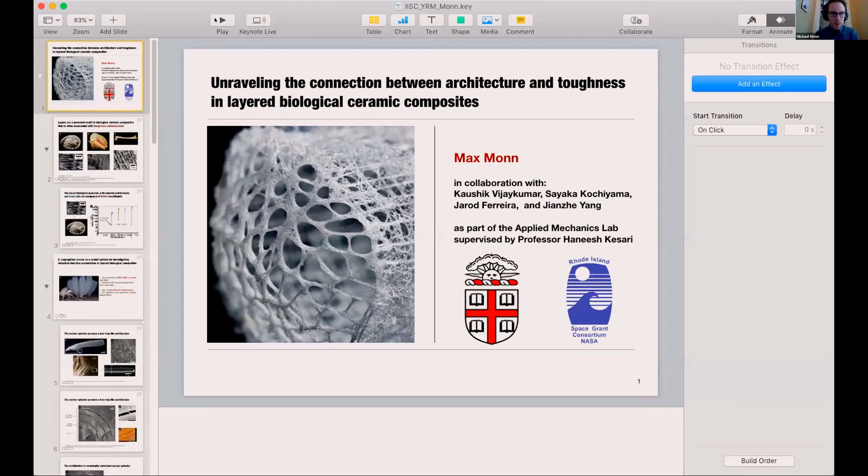Okay, great, awesome. So I'm going to be talking about some of the work I did during my PhD, focusing on a paper I just published this year. The talk is titled Unraveling the Connection Between Architecture and Toughness in Layered Biological Ceramic Composites. It's a mouthful, but I hope we can break it down and learn something new about biology and the world around us, using fracture mechanics to make that exploration.

I did this work in collaboration with a number of people, and I think there's a lot of connectivity with what Professor Simha said during his talk. My collaborators are Kaushik Vijaykumar, Sayaka Kochiyama, Jarod Ferreira, and Jianzhe Yang. Kaushik actually did his master's at IISc under Professor Narasimhan, and he was my batchmate in PhD. We worked with Professor Haneesh Kesari, like Ram had mentioned, and I think what you said, Professor Simha, about mentorship and what you've really demonstrated through your mentorship has resonated with me through the type of mentorship

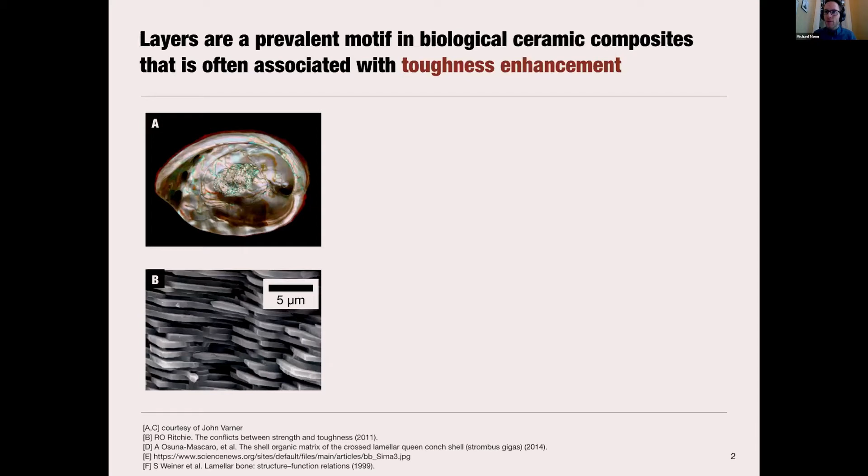I'll start off talking generally about biological materials. Layers are really a prevalent motif in these biological ceramic composites. What I mean by a biological ceramic composite is something like a seashell. If you look at a seashell, like in figure A here, this is a red abalone, and if you cross-section this iridescent layer called nacre and look at it under a scanning electron microscope, you'd see something like figure B, where you have this brick and mortar structure. The bricks are composed of a calcium carbonate mineral, and between the bricks there's a really thin layer of a softer proteinaceous material.

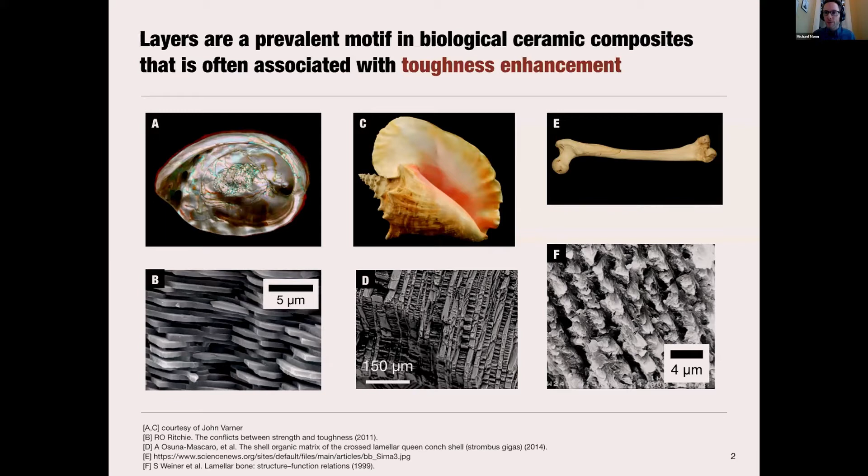This motif appears in other types of shells from other families and taxonomic classes, like this conch shell. In the conch shell, the layered structure is a bit more complicated - it has some hierarchy, with layers within layers, and within each hierarchical level you have this recurring motif of ceramic bricks surrounded by very thin protein layers. We even see this in our own bones. If you were to etch a cross-section of bone, you would etch away some of the mineral, the hydroxyapatite, and you'd see that we also have this alternating structure of mineral and soft proteinaceous material.

What's very interesting about this architecture is it leads to very drastic changes in mechanical behavior. So this shows some tensile tests.

This is from Professor Barthelat, who the next presenter was one of his students, I believe. These are the tensile tests performed on pure aragonite, which is that calcium carbonate mineral that makes up those tablets, as well as nacre, both dried and hydrated. And while there can be a huge discussion about the role of hydration in these materials, I really just want to focus on the hydrated case, because that's the native case, how the shell actually performs in its native environment.

You can see that the mechanical response of these materials is very, very different. The aragonite is typical of a ceramic. It's fairly linear in stress and strain up until catastrophic failure, whereas the nacre has this almost elastoplastic response. And what's really amazing about this is that this response manifests despite the fact that the ceramic makes up over 98% of the material by volume. So a very small amount of this soft proteinaceous material, when added in the correct way with the correct geometry, can lead to this...

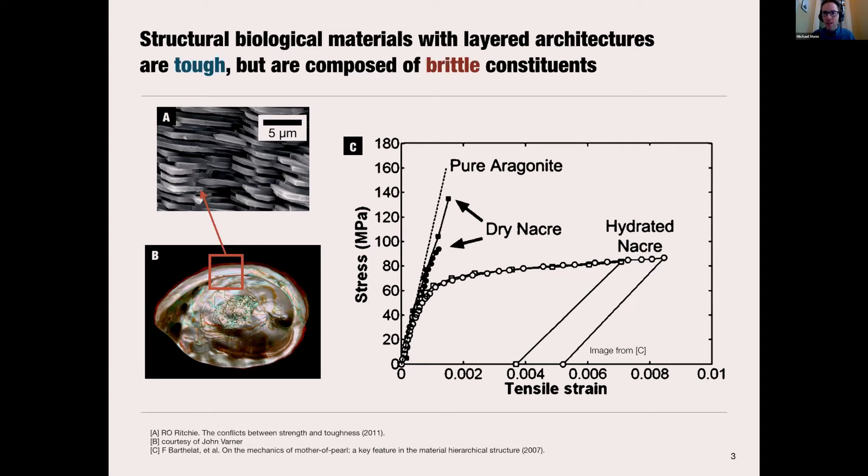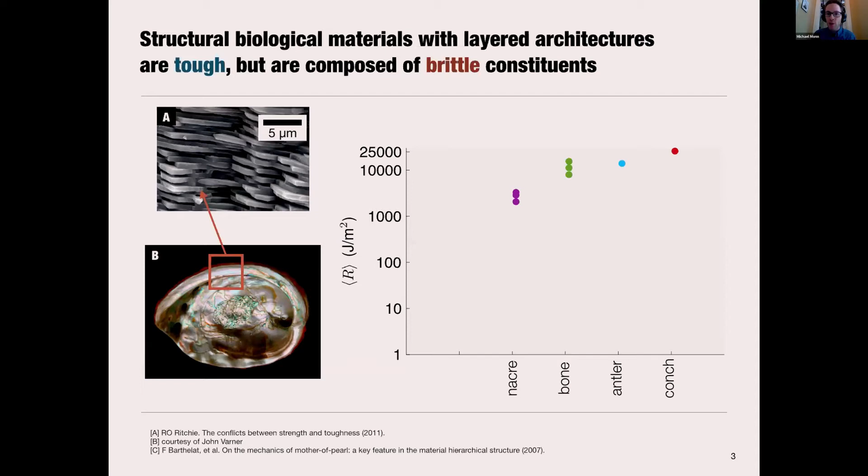...extraordinary mechanical behavior. What this leads to is a huge amount of energy dissipated in these biological materials. So here I'm plotting what you'll see as average R, and we'll get into that a bit later. You can think of it like work of fracture—this is the energy dissipated to cleave the material into two pieces. And that can sit for many biological materials in the range of 1,000 to 10,000 joules per meter squared.

I think if I try to— oh, I can't even see my cursor. Yeah, that's fine.

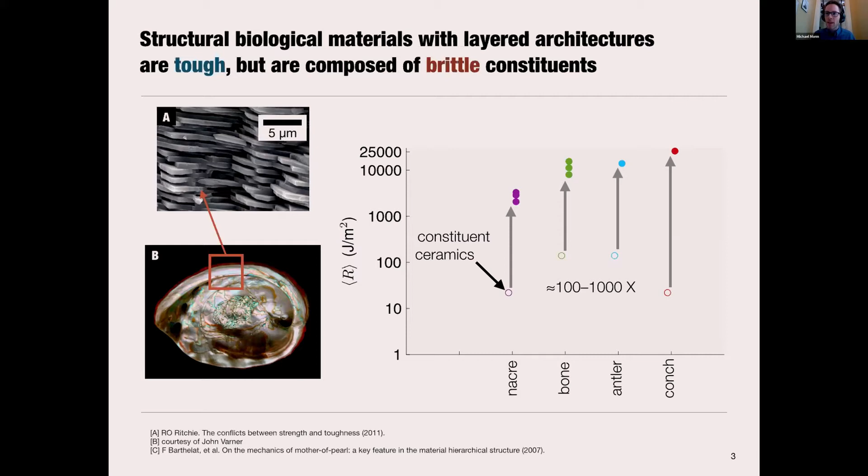And what's really wild is if you were to compare this to the ceramic constituents that make up these materials, the calcium carbonate, the hydroxyapatite for bone and antler, the enhancement in fracture toughness is truly remarkable. This is often several orders of magnitude and has really inspired people to try to understand the mechanisms through which this architecture enhances toughness, with the hopes that we can apply these same concepts in engineering contexts with engineering materials.

I studied primarily a sponge called Euplectella aspergillum, and I use this as a model system for looking deeper into structure-function connections in layered biological composites. This comes back to what Professor Simha was saying about the ocean—these sponges live deeper than we've really been able to explore in the flesh. They live on the ocean floor at depths of about 1 to 2 kilometers, and they feed by filtering microorganisms out from the seawater. They pump water through their bodies and use specialized cells to filter out small microorganisms which they eat.

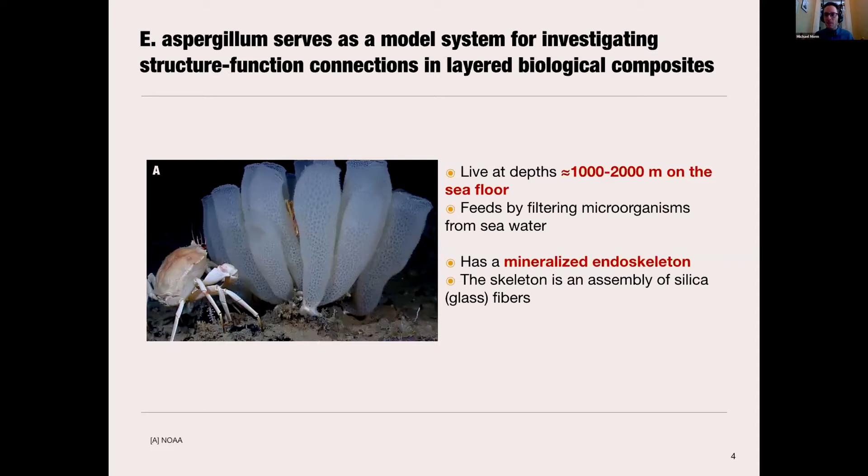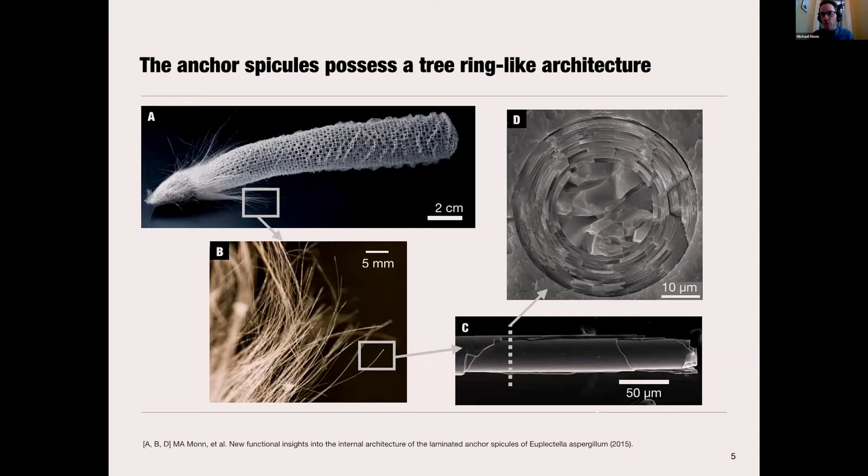What's very interesting is if you look at one of these spicules, they're about 50 microns in diameter, about half the width of a human hair. If you cross-section them and look at them in a scanning electron microscope, you can see that they have a very intricate layered architecture. This architecture is different geometrically than the architectures we saw before in nacre and bone, but it has the same type of motif, which is alternating layers of a ceramic component and a proteinaceous component. The volume fraction of the ceramic component is very high—for the spicules, it's about 99% by volume, and the proteinaceous layers in between these ceramic layers are on the range of 5 to 10 nanometers thick.

Taking a closer look at this tree ring-like architecture, we can see that it consists of a central core that's about 20 microns in diameter, and then a number of silica cylinders. While they look fragmented, like they might be sections of a cylinder, that's just due to the process we have to use to saw the spicules in order to see this cross-section. The cylinders are actually intact, and there are about 25 of them in each spicule.

You can see if you take an even deeper look—this was some work by James Weaver at Harvard, which I collaborated on a couple of years ago for a paper. He looked specifically at this proteinaceous layer, which you can see in subfigure B, a fibril that's spanning two separated silica cylinders.

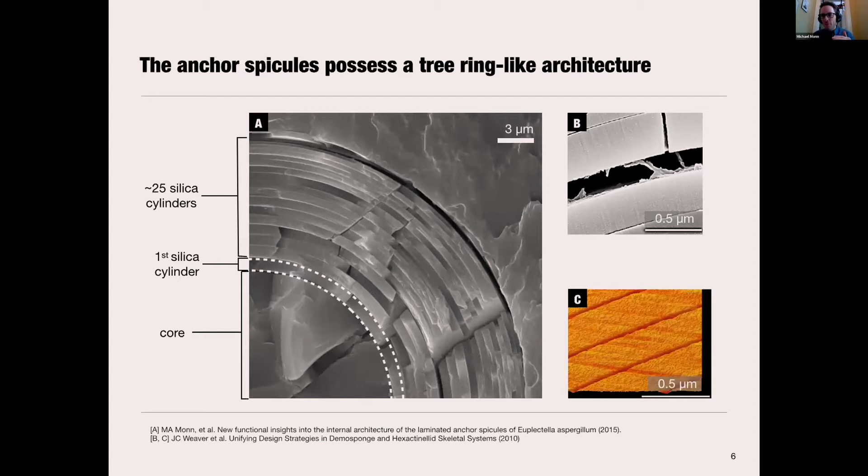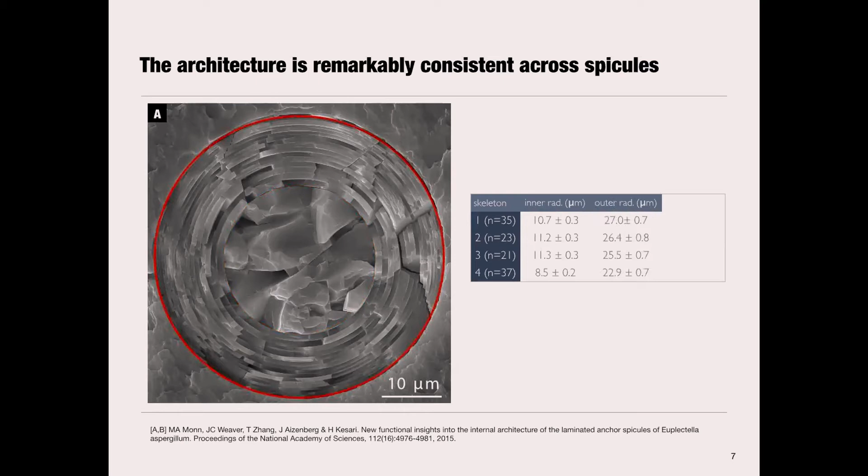Early on, what interested us very much in this structure, in this animal, is that if you look at a number of spicules from a number of different individuals from this sponge—this is showing 4 different individuals, 4 skeletons, with n equals 35, 23, 21, 37 spicules from each skeleton—we measured the inner radius, that is the radius of the core, the outer radius, so the diameter of the spicule, and the number of layers in the spicule.

Looking at this table, if there are any people who are biologically inclined here, this is remarkably consistent. This is not something that varies across different individuals driven predominantly by external environmental factors. This architecture, and the sizes and scaling of the architecture, is really programmed by the animal.

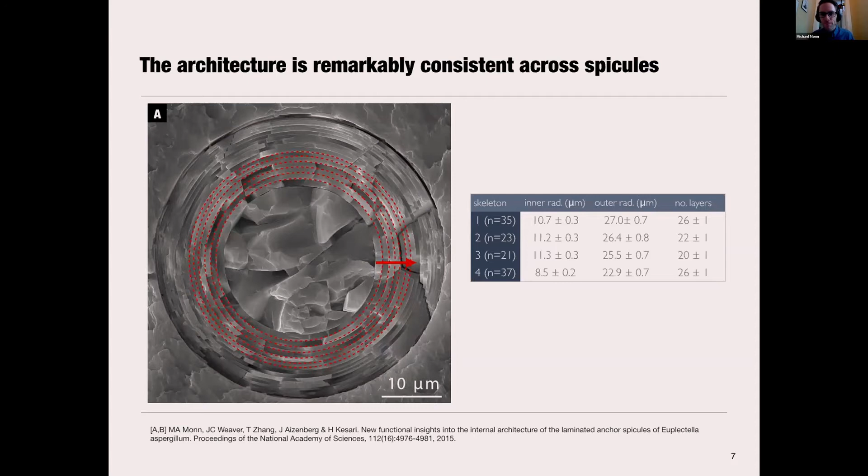So this consistency really drove us to ask the question: does the architecture provide a mechanical benefit to the sponge? And if so, what is that benefit?

Previous researchers have suggested that these layers enhance the spicule's fracture toughness, like we observe in nacre. This was based on the fact that the architecture was visually similar to that of nacre, and also on 3-point bending tests on some related species—in subfigure B, the gray curve is from a different species of sponge that also has layers, albeit many more of them, about 500 layers in this case. They have this jagged force-displacement response, which researchers attributed to a progressive failure of the layers and an increase in energy dissipation, suggesting the layers provide a mechanical benefit by enhancing the energy dissipated during failure.

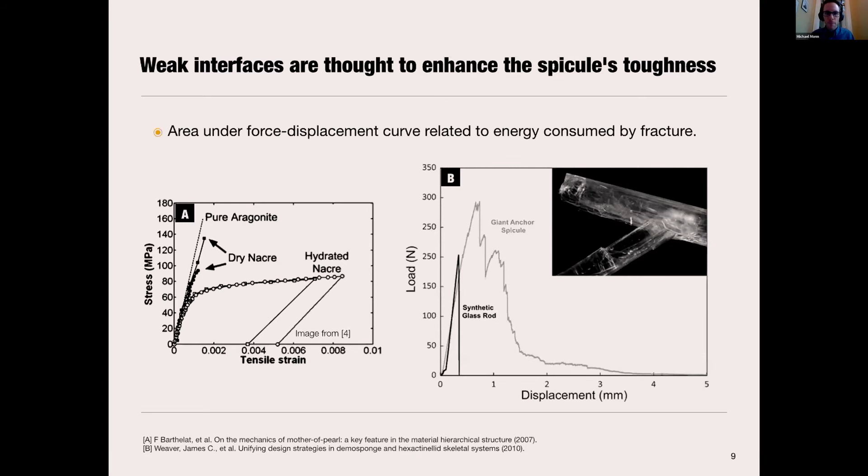This has never been investigated for euplectella spicules—it's really just been attributed to them. Several researchers have made claims that the spicule's layered structure enhances their toughness, but there's never been an experimental investigation of that enhancement. So that's what we set out to do.

The first step in that process was constructing a mechanical testing device that could measure the flexural response of these spicules, and measure the energy dissipated during the propagation of a crack. To do that, we needed to measure forces in the range of micronewtons to millinewtons, and displacements in the range of microns to tens of microns.

So we didn't find an Instron to be sufficient. Well, all of you are muted. I hope several are laughing.

Also, something much smaller like an AFM couldn't provide the maximum forces we needed, so we basically designed a scaled-up AFM. This device has a sample stage that we place our specimen on, and the specimen spans a trench in the stage. Then we come down from above with a wedge, a tip, just like an AFM tip, except quite a bit coarser.

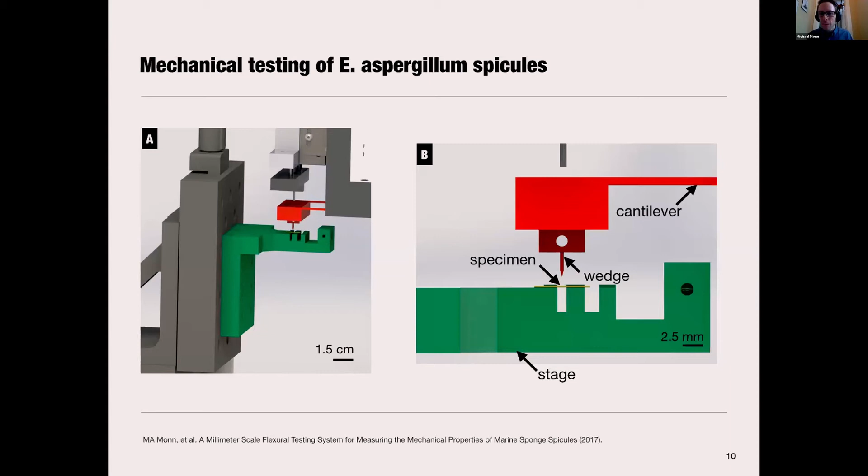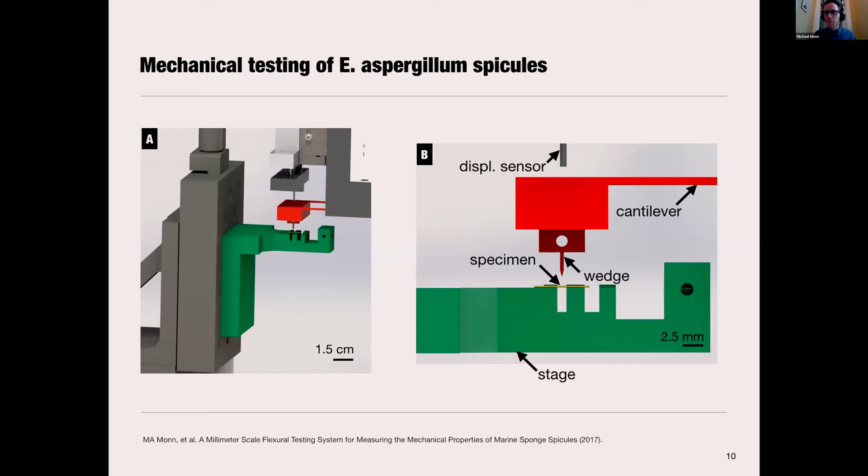That tip is attached to a cantilever whose stiffness we measure, and the deflection of the cantilever is measured with a fiber optic displacement sensor. So this is basically a homebrew scaled-up AFM for doing these flexural tests on micron to tens-of-micron diameter fibers.

When we perform our bending test, we move the stage up and measure the displacement of the stage, W sub S. In the process, the cantilever deflects an amount W sub C, and we measure the force based on the cantilever's stiffness and its deflection. We can then compute the deflection of the load line, or the displacement of the cross-section of the spicule, W naught, based on those measurements W sub S and W sub C.

This serves two purposes for us, one of which I'll discuss later. One is very practical: these fibers are very small, several millimeters long in the sections we've cut, and about 50 microns in diameter. So handling them can be frustrating, and gluing them down helped a lot with that.

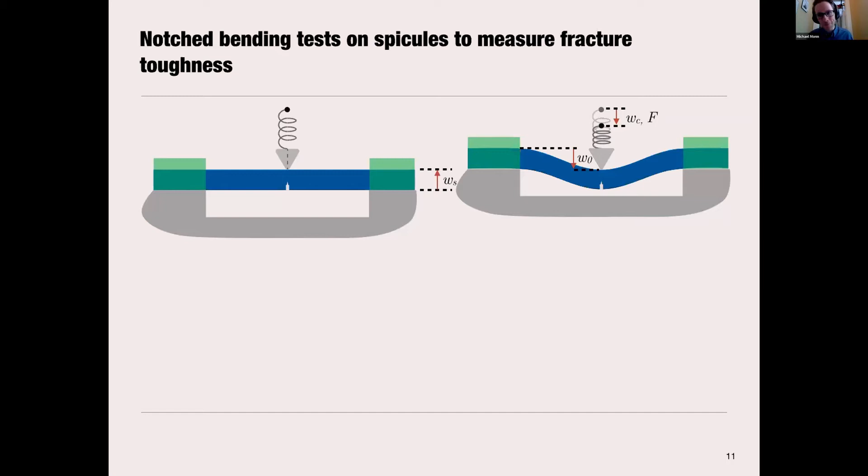This stage was moved in 1 micron increments, and we measured the cantilever deflection with a fiber optic displacement sensor. Then we computed the force and the specimen deflection W naught. So that shows our measured quantities and our computed quantities.

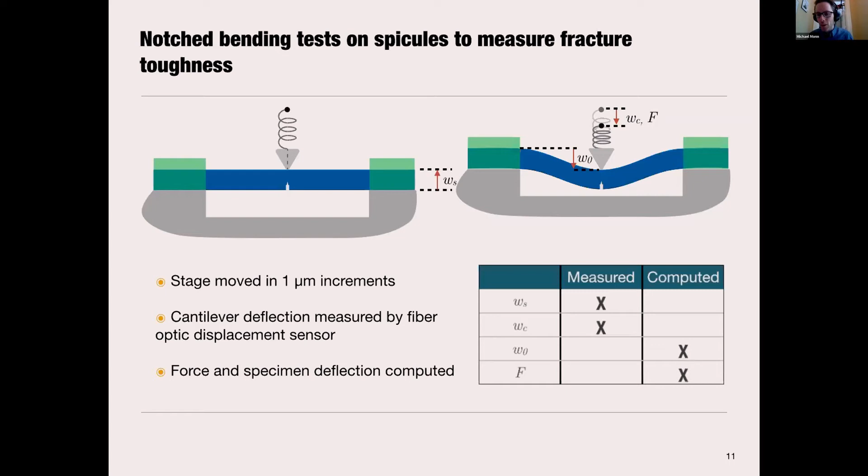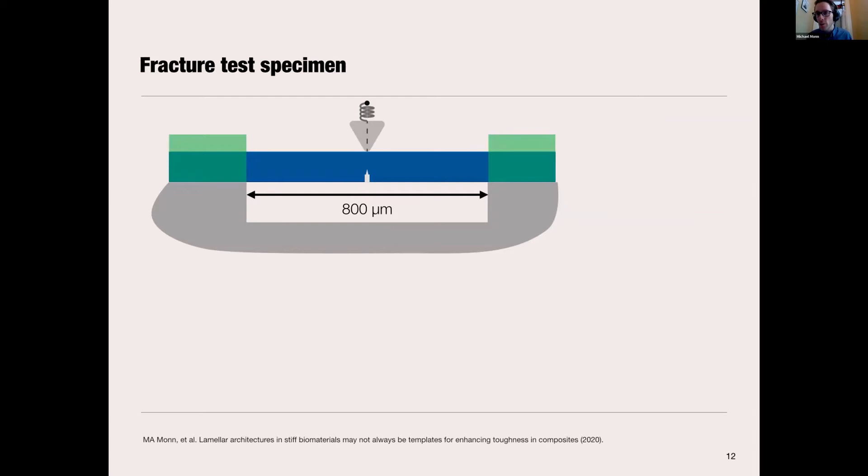To discuss a bit more about the specimen, our gauge length is about 800 microns. And if you look, you can see there's a notch cut in the specimen right under the wedge that we apply a load with. We cut that notch with a gallium ion beam.

You can see two dotted lines here, a green one and an orange one, and we cut it in 2 steps. That's because we were trying to cut rather deep notches. When you're cutting with a focused gallium ion beam, the gallium ions ablate material, and that material can sometimes redeposit. We didn't want that, so we started with a wide coarse notch and then created a very sharp notch at the tip.

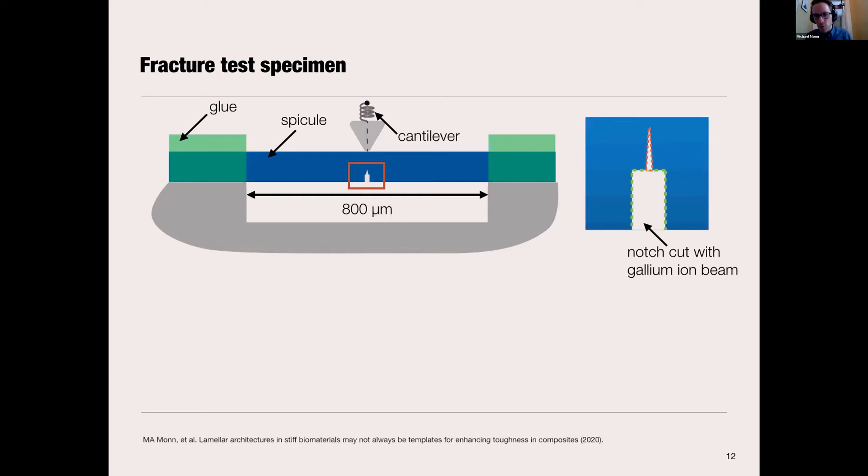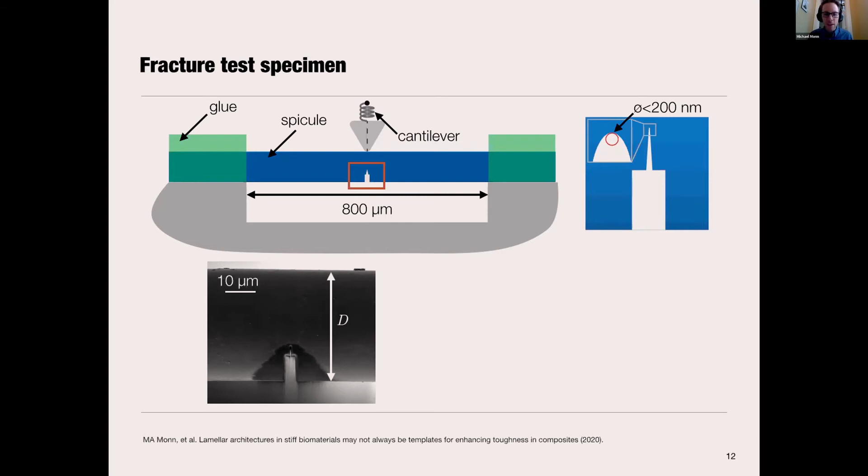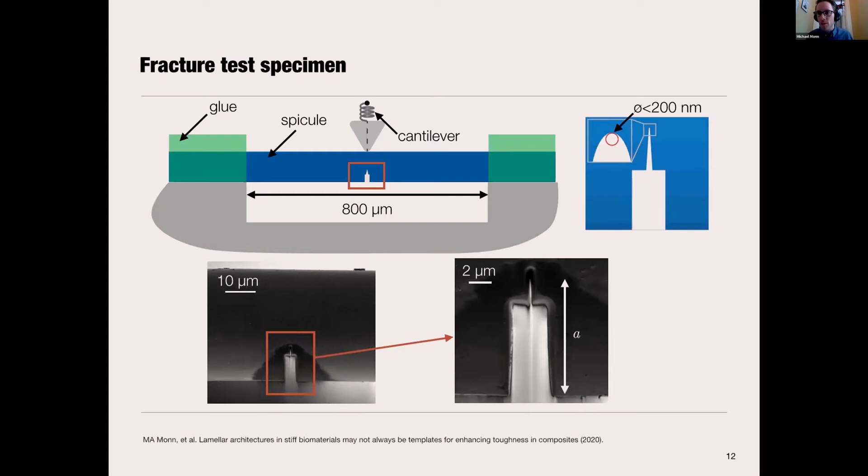I've been showing you schematics this whole time, but we should look at what it actually looks like in a SEM. This is a picture of a representative sample that we had. If we zoom in, you can see that 2-stage notch with a total length A. The notch root radius at that tip was typically on the order of 50 to 100 nanometers, which is smaller than the smallest microstructural length scale of the spicule.

So we performed a load and then an unload on the sample. I'll show you that one more time: a load, and then we unload the sample again in 1 micron increments.

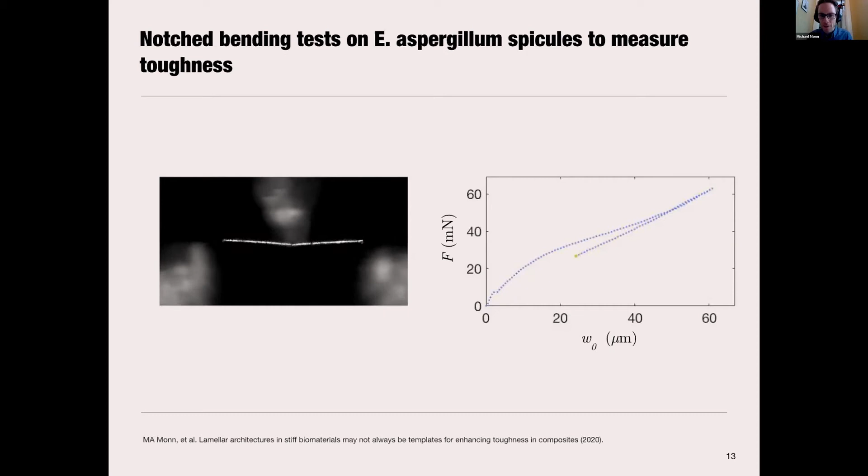If we take a closer look at the force displacement curve, this is where we start to see some very interesting features. You can see initially the curve increases, and then there's a small drop. This is a pop-in event associated with the initiation of crack growth from the notch root.

After that crack growth initiation, the response becomes nonlinear until we reach this green square, which I'll mark as complete failure. I'll describe why we think that is the point of complete failure.

For a particular specimen, after the crack has grown all the way through the cross-section and completely cleaved the sample in two, there isn't a total loss of stiffness. You actually end up with a configuration that looks like this: you have 2 cantilevers that are being displaced.

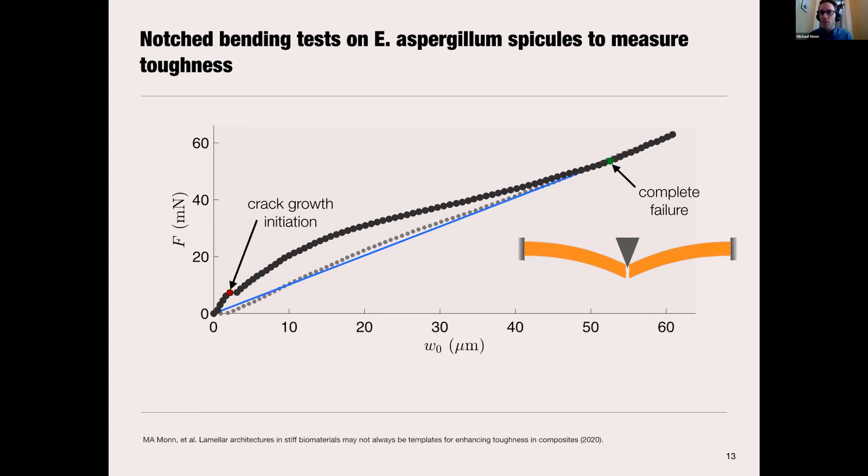That should lead, at least initially for small deflections, to a linear force displacement response, which is what you see after that point of complete failure. So that nonlinear region between the crack growth initiation and the complete failure, we believe corresponds to the region in which the crack is growing across the spicule's cross-section.

Once you reach complete failure, which is really the point of minimum elastic compliance, that's what you'd expect as the crack grows through the cross-section — the compliance of your specimen will decrease monotonically until the crack completely cleaves the specimen. That's how we define our complete failure point.

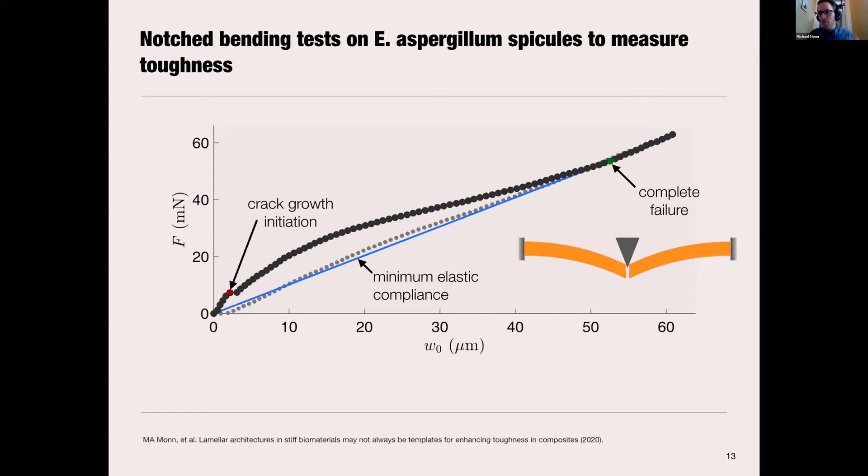You can see that it lines up pretty well with the unloading, which is those light gray points. There's a small residual displacement at the very end of the unloading, due to the fact that as you unload, the two halves of the spicule don't completely intermesh again. There can be some interaction between the two tips of the cantilevers that prevents them from returning to the same place as the reference configuration before we started the experiment.

So from this, how are we going to quantify toughness? How do we measure toughness?

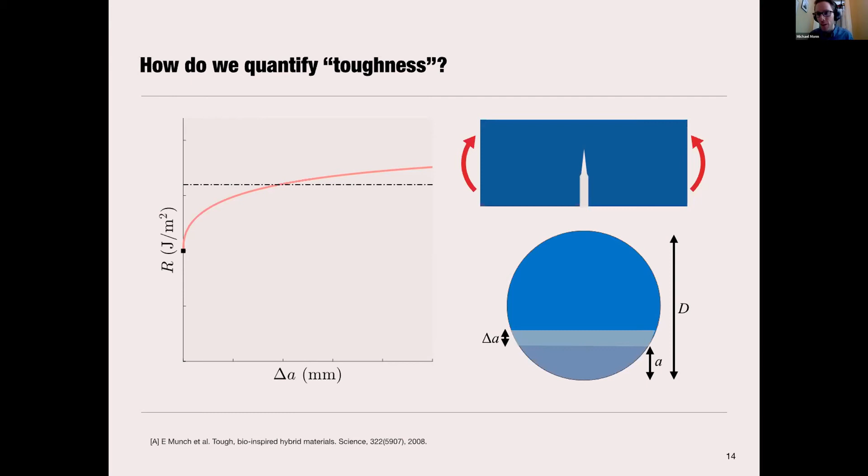Rather than trying to measure the entire R curve, which can be complicated with materials that have extrinsic toughening mechanisms, we're going to characterize it by two specific points: that is R at 0, which is the fracture initiation toughness by another name, and the average value.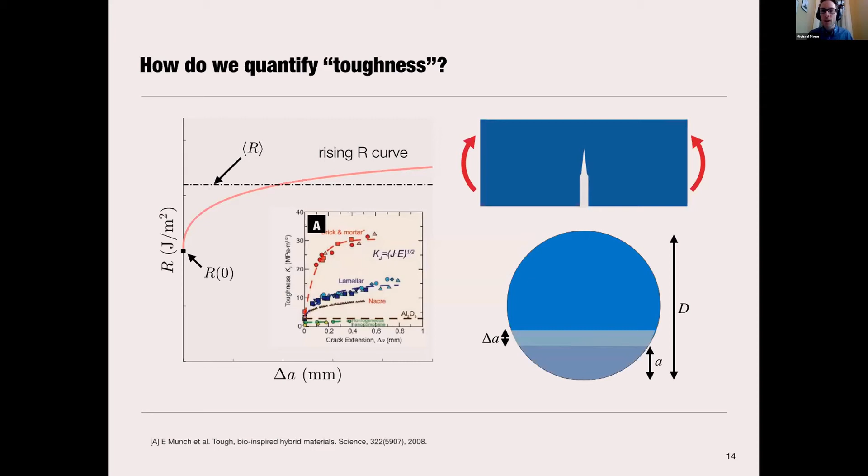The fracture initiation toughness should be a material parameter. It should be a constant, or roughly so, not necessarily the case in heterogeneous materials. The average value of R is not — this corresponds to work of fracture. It can be shown that average R is actually twice the work of fracture, and that can be size dependent on the material. It can be sample geometry and loading configuration dependent, so we need to be careful when we're making comparisons with this.

I'll start with how we measured the average crack growth resistance. As I said, average R is twice the work of fracture, which is the total energy dissipated in that fracture process divided by the cross-sectional area of the ligament. We can compute the work of fracture using an incremental energy balance, where on the left-hand side of this equation you have the total extrinsic work done on your system. On the right-hand side you have some elastic energy, that's U sub EF, and your energy dissipated by fracture, UF.

In many cases, the elastic energy is going to be 0 — for example, for a standard CT test or a standard 3-point bend test. Once the sample has failed, it's no longer carrying any load, so your elastic energy will be 0. In our case, that's not the case because of the cantilevers that I showed you previously, from when the sample is in its completely failed state. So the left-hand side, the external work done, can be found by the area in between the loading and unloading curves, or more cleanly in this case, the area between the loading curve and that line of minimum elastic compliance drawn to that green dot, that point of failure.

And the elastic energy — I can't see that equation, it's kind of hidden by some views here. Maybe I can minimize this... no, okay. Anyway, I think it says force times the displacement, divided by 2.

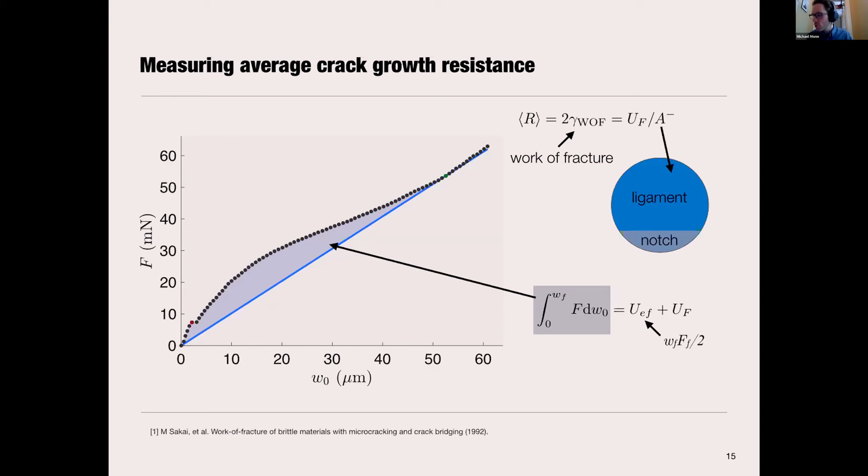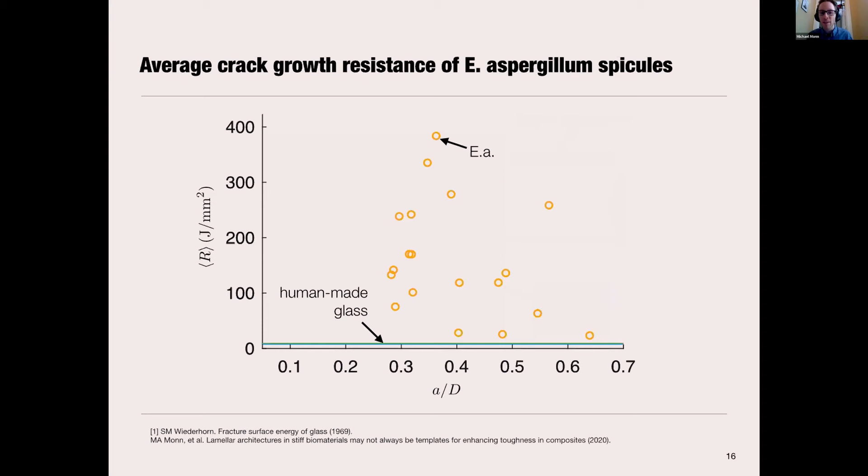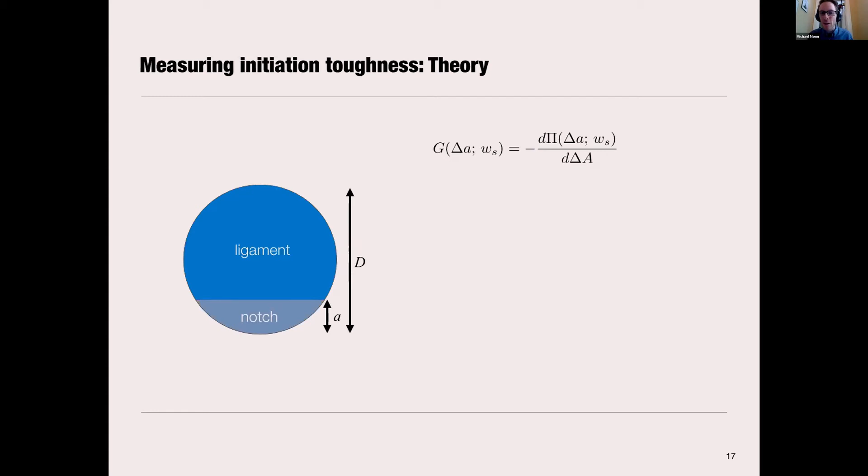For the initiation toughness, we go back to the energy release rate, which is the derivative of the potential energy of the system by an increment in crack area, delta big A. This depends on the shape of the cross-section. So if we recast this as a derivative of potential energy with respect to a crack length, you also have this second term on the right-hand side, delta big A, d delta small a, which captures the cross-section — a little complicated to use the circle rather than a rectangular cross-section.

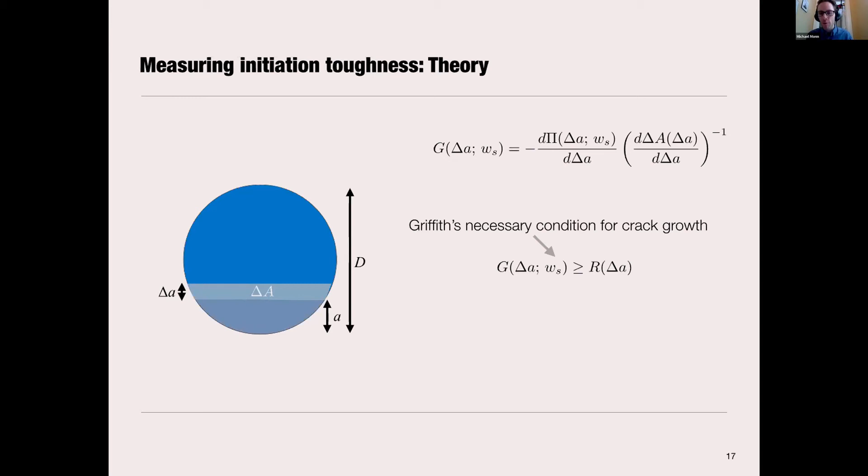So Griffith's necessary condition for crack growth says that crack growth can occur when your energy release rate exceeds your crack growth resistance. Using that, and taking delta A going to 0, we can write this equation as your initiation toughness, R0, will look something like this, where the first term captures that geometry effect, and the second term is that change in potential energy.

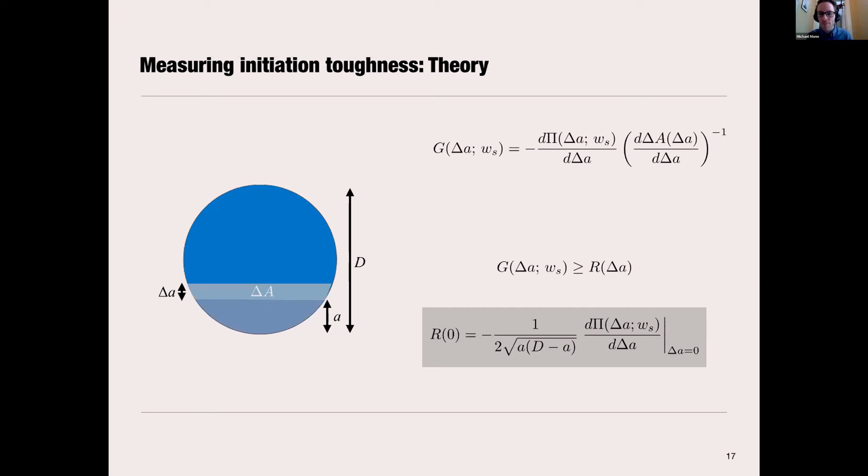So we get that second term from a computational mechanics simulation. In that simulation, we apply a displacement W sim, and we can do this rescaling with the WC by W sim out front here.

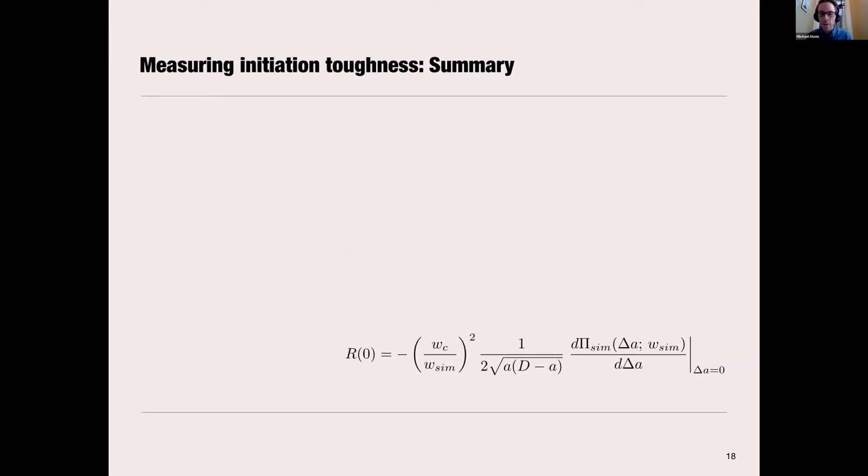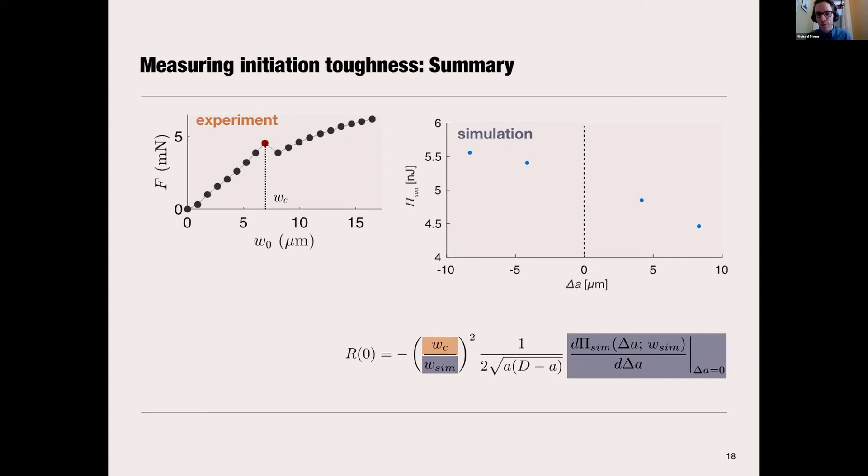In our experiment, we measure the deflection of our cantilever at the initiation point. From our simulation, we use a 4-point central difference to get a change in potential energy with respect to a crack increment, and we measure these geometric quantities from the micrographs.

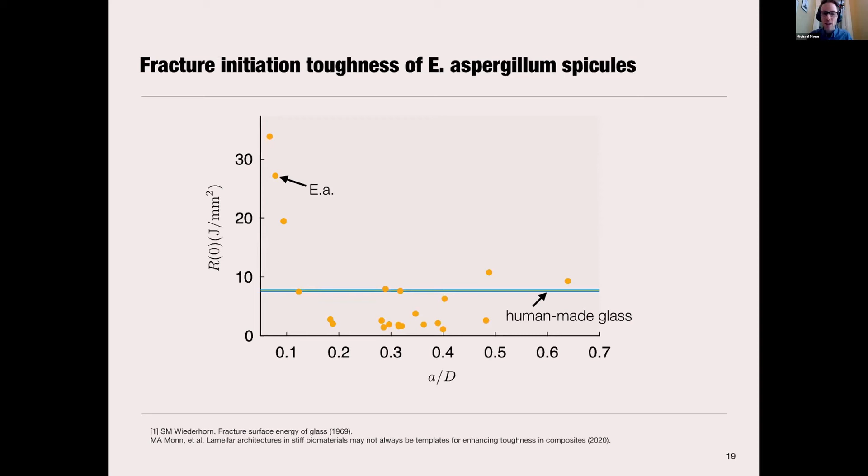Here we can see the initiation toughness as a function of A by D. This increases as A by D becomes very small, less than 0.1. But in a middle range of A by D, from about 0.2 up to 0.7, it's relatively constant, with a value between 1 and 10 joules per millimeter squared. Human-made glass is shown to have initiation toughness around 7 joules per millimeter squared.

So how do we quantify?

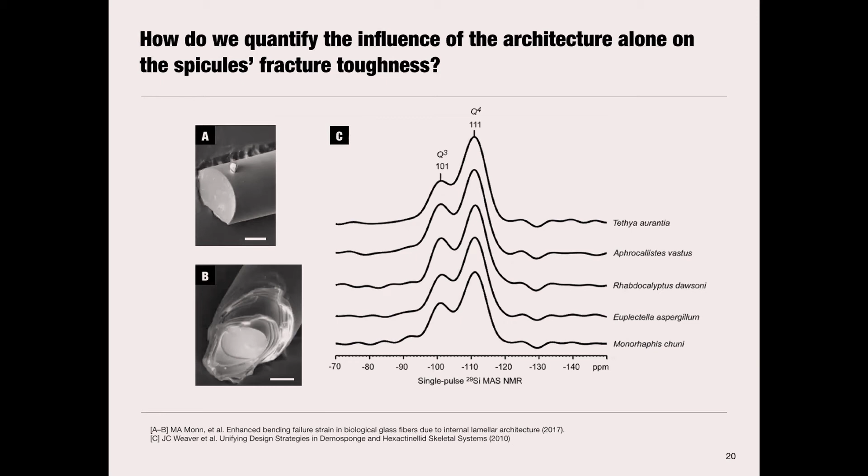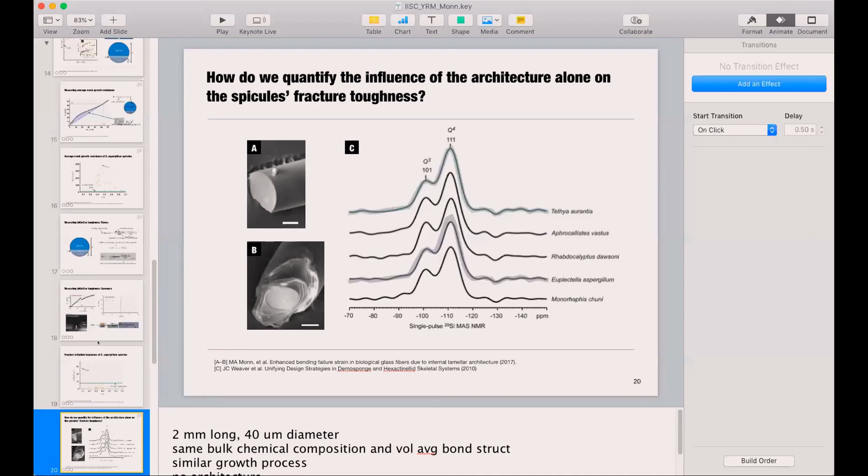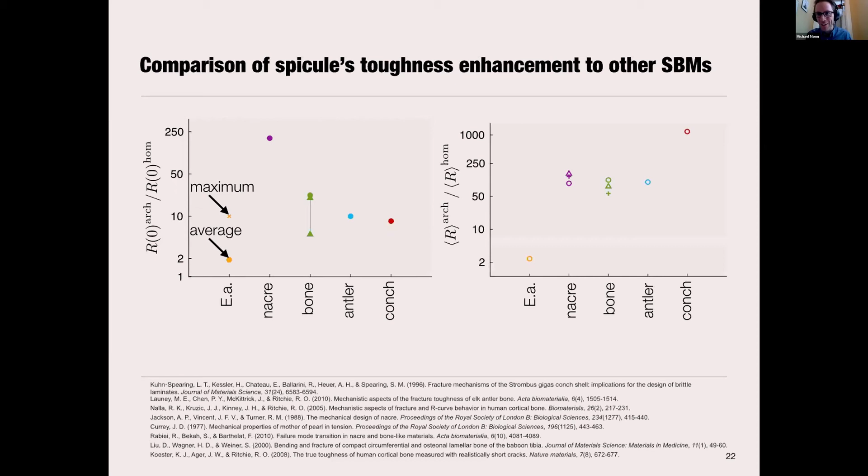Sorry to interrupt, we're close to the time. I have a couple of suggestions - we can continue during the break. If you'd like to hang around after the half hour break, we can continue the presentation. I can hear Hanish coming through. So that's one option - if for the benefit of the audience who will leave for the break, you want to just show a concluding slide, we can have that now. But I hope you'll stick around during the break and give us the rest of the story. Yes, of course, I'll show a concluding slide then - it spoils it a bit, but that's understandable. I'll hang around during the break as well if anyone's interested in hearing the last couple slides. I am very interested, 100%.

What we really found is that compared to these other materials with layered architectures, like nacre, bone, antler, and conch shell, the enhancement in fracture toughness, both in initiation toughness and in this average R sort of metric for toughness, is very, very small. It doesn't really compare at the same scale - you don't see the huge enhancements seen in these other materials. An enhancement of 2 to 10 is still very impressive in an engineering sense, but it leaves this question mark as to why this particular material doesn't perform like these other materials.

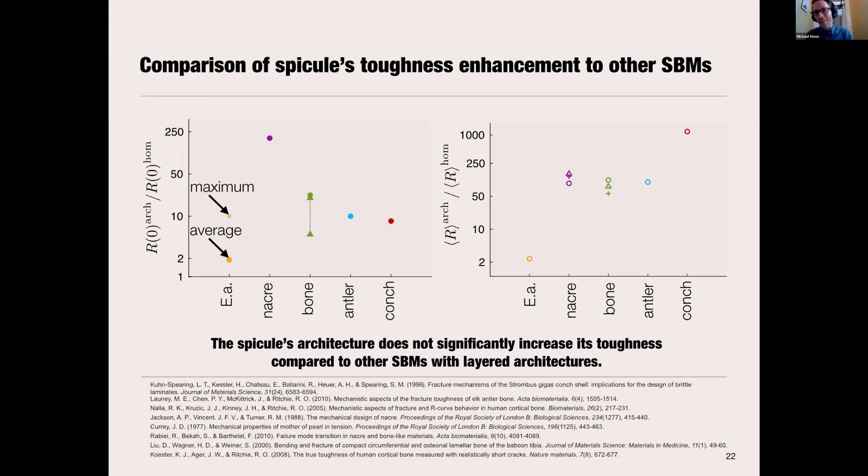The secret to that lies in the geometry of the layers, the curvature of the layers. So I'll end there, and if people want to hear more during the break, I will stick around.

Yes, please, certainly. I would request the audience to stay back in half an hour's time so we can listen to Max connect the dots from where he left off. Thank you, Max, I hope you'll also hang around. Max, if you're still there and you'd like to complete your talk, I'm here to listen. I am, thanks Rob.

If anyone is still interested, there were only about 3 slides that I didn't show. I received a couple questions in the chat, and I think it might answer a few of those questions, so I'd be happy to share.

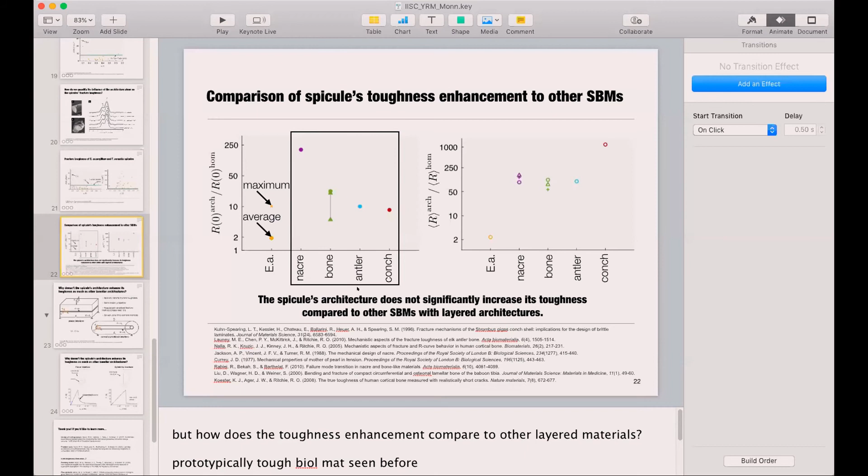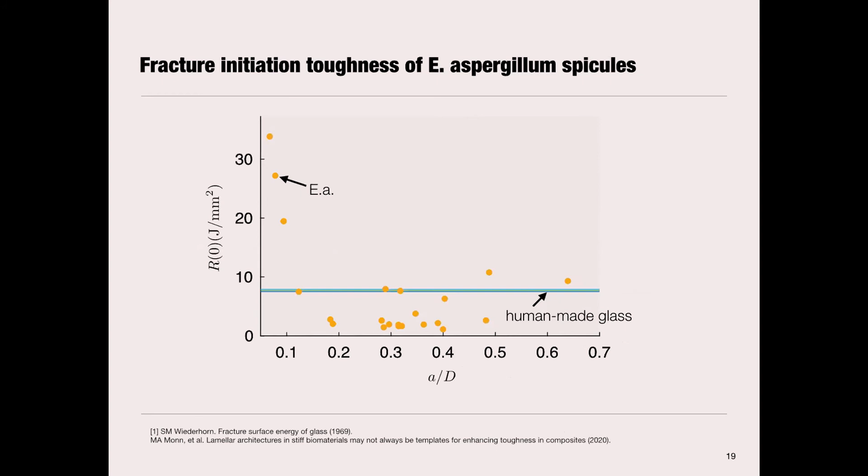So I stopped here, which is really where I was getting to the idea that we need some sort of metric to compare this material to, because at this point I've been showing these lines for human-made glass, but really this isn't just standard glass. It's chemically fairly different - it's partially condensed silica, meaning it's not just SiO2 fused silica. It also has some end groups, like some hydroxyl groups. You can see that in this single pulse silicon NMR spectra.

So the Euplectella spicules I've been looking at are shown here, and these are spicules from other sponges related to Euplectella. Some of them have layers, but one that doesn't are these spicules from a sponge called Tethya aurantia, shown in figure A, a cross section. You can see it's monolithic, but it is chemically basically the same - these curves are just vertically shifted to show the differences. The tricky part is that these spicules are even smaller - about 40 microns in diameter, and only about 2 millimeters long.

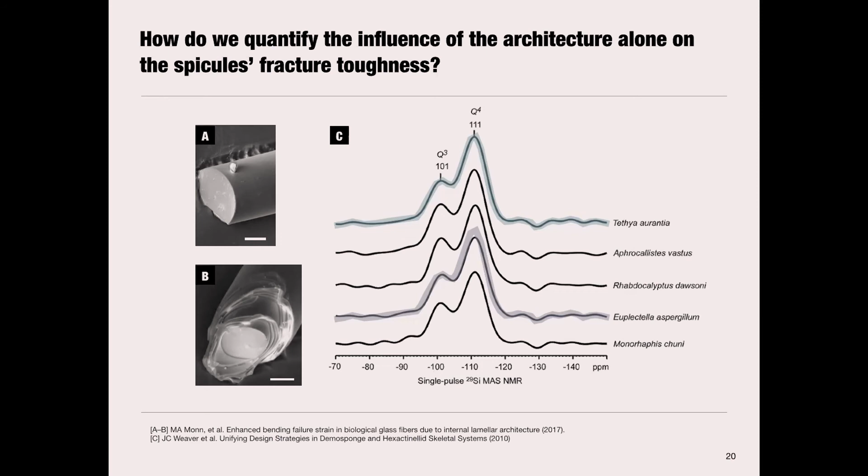For very small A over D, the Euplectella spicules do have a significantly higher initiation toughness. Getting work of fracture for the monolithic spicules was actually quite a bit harder, because when computing work of fracture, we need a continuous force displacement response indicating there's no unsteady crack growth and unaccounted for kinetic energy in that incremental energy balance of external work versus elastic energy and energy dissipated by fracture. So there's far fewer samples here.

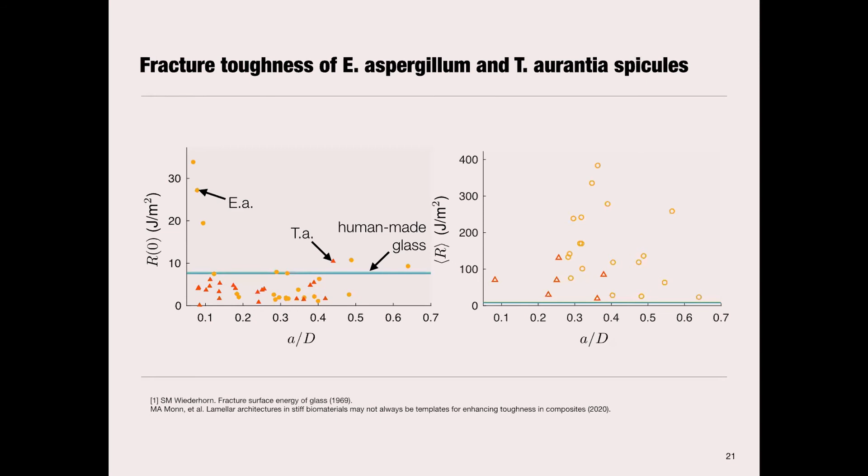But we see that they do have a lower average R value as well. However, as in the concluding slide I showed before, when we compute the ratio of initiation toughness and average R of the architectured version of a material, like a Euplectella spicule or nacre, bone, antler, conch shell, to their constituent ceramic component — for Euplectella we used the Tethya spicule, and for nacre, bone, antler, and conch we used references from hydroxyapatite and aragonite — this ratio really says how much the toughness is enhanced, both in initiation toughness and in total or average energy dissipated, this average value of R. We can see for the Euplectella spicules the enhancement in both initiation toughness and work of fracture is significantly less than these other materials.

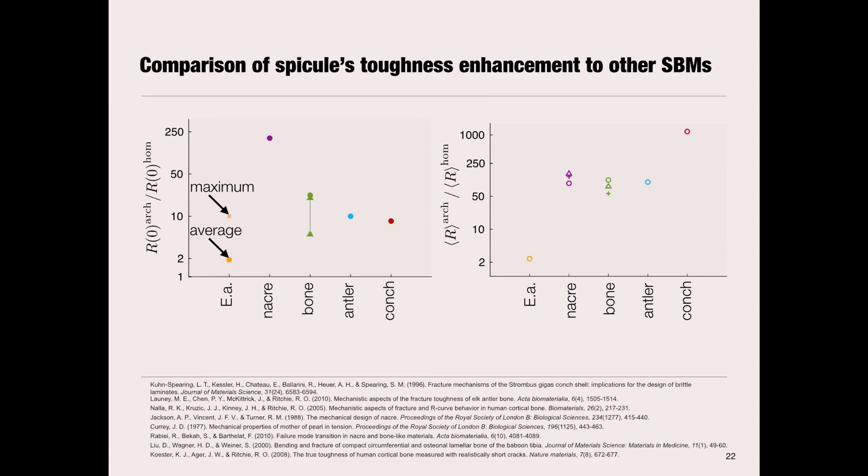And the question we had was why. Why is this material, which many people speculated also has this crazy toughness enhancement, why doesn't it achieve like these other materials?

This was work I did in collaboration with my batchmate Kaushik Vijay Kumar, who developed a phase field model for fracture. We looked at two representative cases: one with a planar interface, one with a curved cylindrical interface, with the volume of the samples kept the same. The only thing that changes between these materials is not constitutive behavior, just fracture toughness.

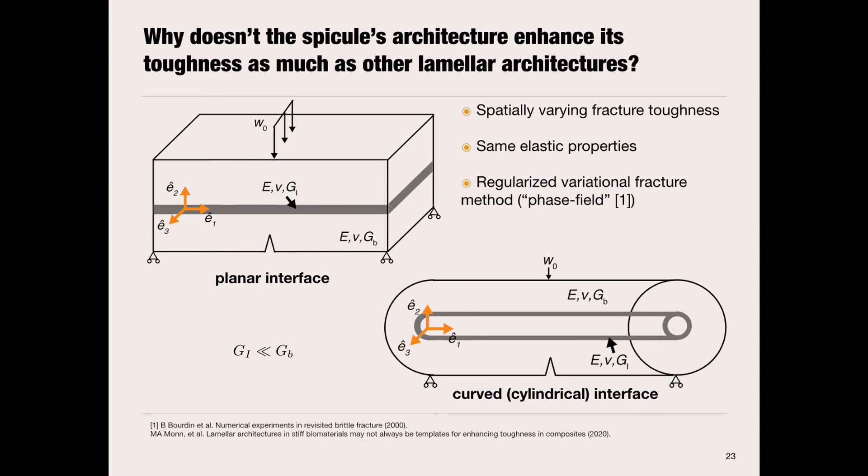We specified an interfacial fracture toughness GI, much less than the bulk material, in a very thin interface of a cylindrical shaped interface and a planar, flat interface. By spatially varying fracture toughness with the same elastic properties, using a regularized variational fracture method, or phase field fracture method modeled after Blaise Bourdin's work, we looked at the response of these two model systems.

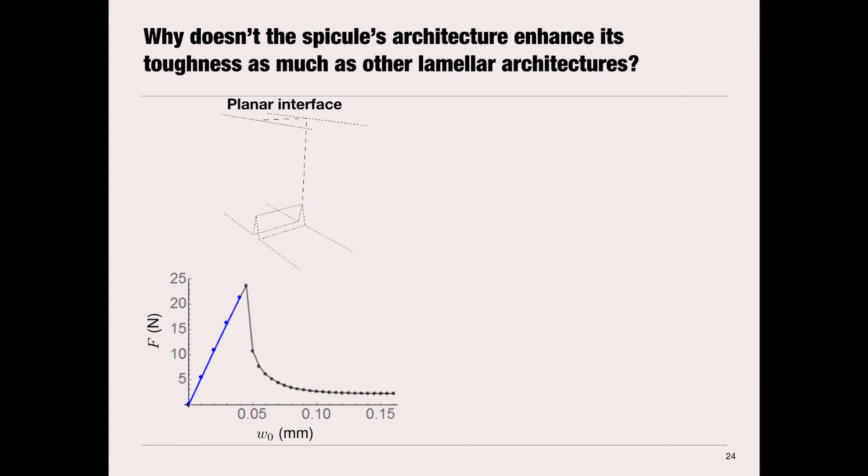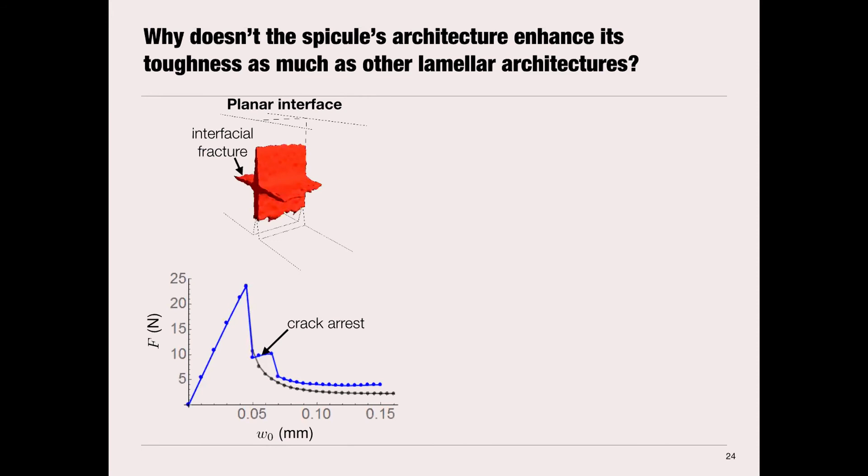For the planar system, you can see the crack growth shown in red as the damage field on top, and on the bottom we have the force displacement response. You can see a jump in the force displacement response, much like you'd see in nacre or even the architectures that Dr. Yin just presented. This jump corresponds to crack arrest at the interface, or a Cook-Gordon mechanism, as well as it being accompanied by some deflection. But the deflection at the interface doesn't actually dissipate that much energy, because the toughness of the interface is so much lower.

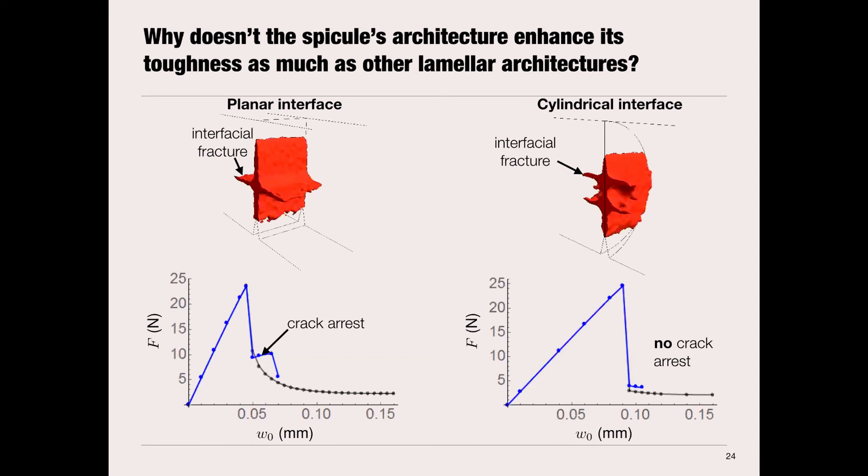If we look at the same thing for the cylindrical interface, what's very interesting is that we don't have that same jump in the force displacement curve. We still see the crack deflection at the interface, but we do not see crack arrest occurring. We attribute this to the geometry of that interface, and that's work still being explored in the Kesari lab, from a computational and theoretical standpoint, looking at the role of interface curvature on both promoting or suppressing toughening mechanisms like the Cook-Gordon mechanism.

If you want to learn more, the design of the testing system was shown in the first publication, and most of the results I showed today are in the second publication. In one of the questions I received in the chat, from Professor Jairam, there is — we actually referenced their work a lot in the design of this experiment, so I wanted to acknowledge that and say thanks as well.

Thank you, Max. Typically with curvature, we expect an increase in stiffness, for example. But it's interesting that it could also affect toughness. I'm not familiar with how, but it's an interesting idea.

In brief, you can think of it like this: as the crack is growing towards the interface, if it's growing towards a flat interface, it sees a plane of weakness and can nucleate daughter cracks ahead of the primary crack anywhere in that plane. Whereas if you have a curved interface, the crack's only really seeing a line of weakness, that first cusp of the interface. As you move further along the interface away from that line, you're also moving further from the crack tip, so the stress is lower there.

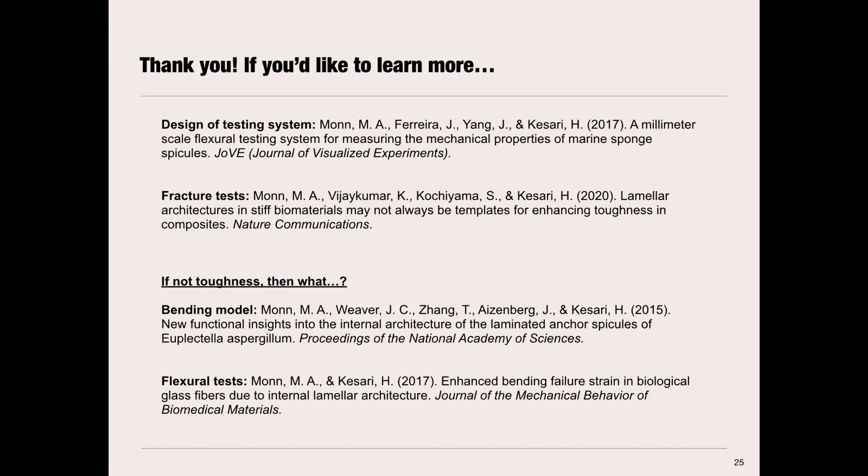I'm quite interested in the studies on the sponge spicules. I know that layered structures in general, if continuous, usually don't perform as well as discontinuous structures in terms of toughness. But I know the sponge spicules have layered structures like concentric rings. Is it, along the axis, always continuous, or is it also segmented? No, it's continuous along the axis.

Yes, and I totally agree that segmentation can play a huge role in redistribution of stress, as you had shown, involving a greater volume in that energy dissipation. This is a strong motivator for really thinking critically about the initial claims that this architecture produces toughness enhancements like nacre. They're often cited together, often talked about together, but through a combination of the experiments you showed and the experiments I showed, I think it's clear we need to be more careful when talking about these materials at large, and start differentiating with a higher level of granularity about the advantages of certain architectures over others.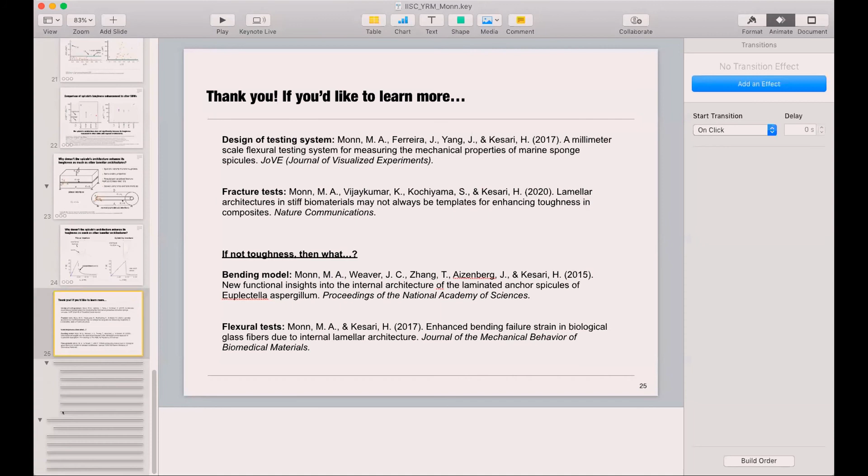I'm not sure if you're familiar with Corning. They did some highly flexible glass, brittle glass, very thin but you can bend it quite a lot. But it's still brittle. I received some samples and they're still very brittle. Is it possible that the mechanism between brittle glass and sponge spicules has some similarities?

Because the mechanism of brittle glass is that you remove the edge defects and those things, since glass itself, if there's no defects, is a fascinating material. The brittleness and low damage tolerance comes from the defects when you do the manufacturing, like edge defects. So I was wondering, since sponge spicules are at a very small scale, is it possible that the absence of nano and micro defects within each layer causes the high flexibility of the spongy spicules?

I think to address the two points: first, about this idea of materials becoming less sensitive to flaws at the micro or nano scale, I think we can show that's not the case by comparing the euplectella spicules to the monolithic ones, the Tethya spicules. We don't really see that same kind of size effect as you'd expect from work by a professor like Huajian Gao, that type of thing.

But I do think your point about suppression of defects is very important, and I agree. I think the outer layers of a spicule are likely sacrificial - if they take most of the damage and most of the interior layers are defect-free or near defect-free, that can greatly increase the strength of the spicules. I've also done other work looking at internal deformation mechanisms that could allow greater flexibility in the spicules.

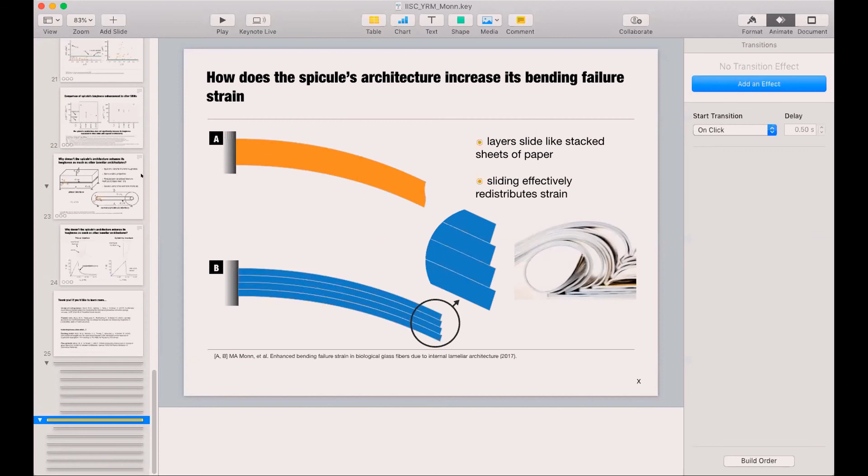I see a few other questions in the Q&A. In terms of the ceramic being broken into two pieces, what's the source of that energy?

A number of toughening mechanisms, like Dr. Yin showed in his presentation, you can have large-scale tablet sliding, dissipation at the interfaces due to viscoelasticity of the protein, and you can have crack bridging. There are a very large number of mechanisms that can precipitate these enhancements. We were mostly focusing in this work on just one, the Cook-Gordon effect, or nucleation of cracks at weak interfaces ahead of the primary crack tip.

And the next question is about higher toughness for short cracks. That's something we're still honestly looking into, but our first take is that as you move towards the periphery of the spicules, the cylindrical layers get thinner and thinner. So the effect of mechanisms like daughter crack growth and crack arrest becomes more significant for short cracks because they're able to see more interfaces in front of the crack tip at the same distance.

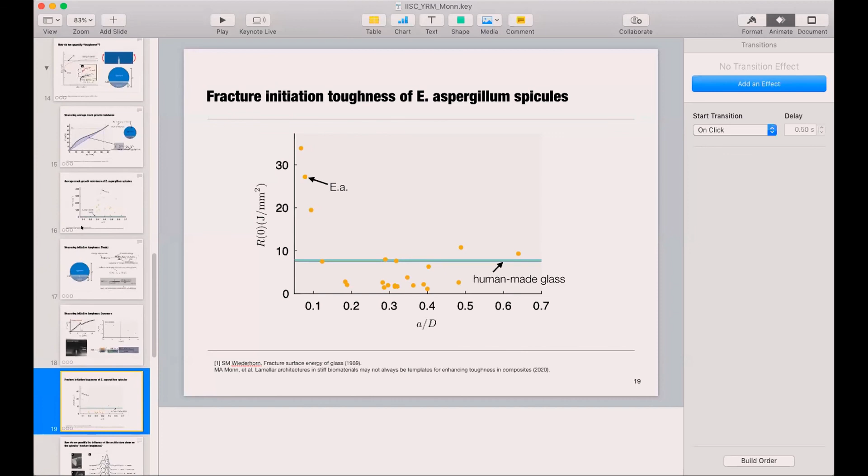If I may continue with that question - the reason I asked is even in monolithic materials, we are seeing that for very short cracks there is sort of a spike in the fracture toughness compared to longer cracks. I wasn't sure whether it's the effect of the architecture in the material or whether it's something to do with short cracks versus long cracks generally.

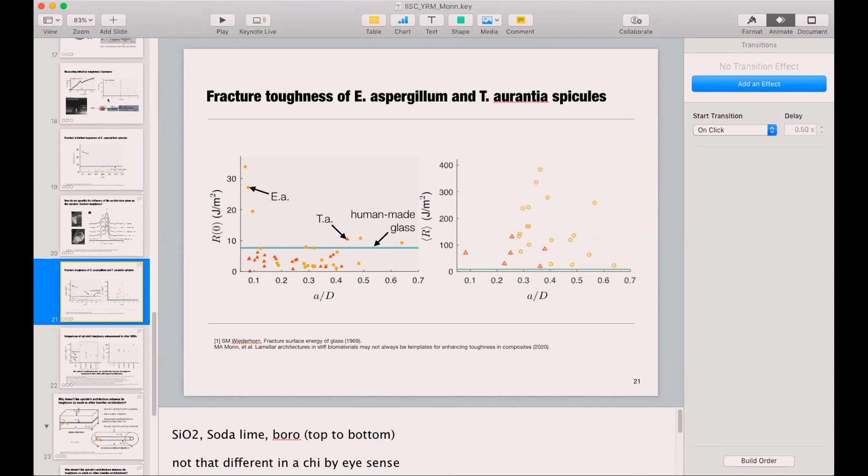I had another question about the experimental method itself. When you make these kinds of notches - since we also worked on clamped conditions - we always found the notch was difficult to maintain straight. So when you assume it has a straight cross section, a straight front of the notch in a certain section, I guess that's an assumption, right?